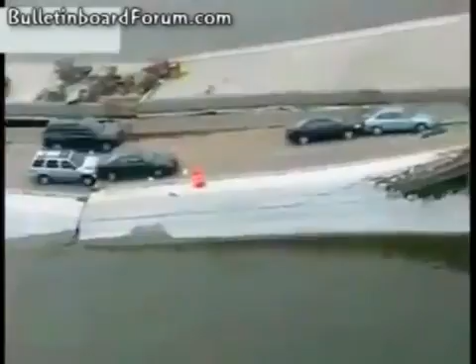In 2007, the I-35 bridge in Minneapolis collapsed in the height of rush hour. 13 people were killed and 145 were injured. In hindsight, there were signs of this impending doom, but there was no system in place to notify inspectors of the deficiency. We wish to introduce a widely implementable system to measure and/or monitor the health of a bridge in real time to prevent tragedies like the Minneapolis Bridge using state-of-the-art technologies available to analysts and engineers.

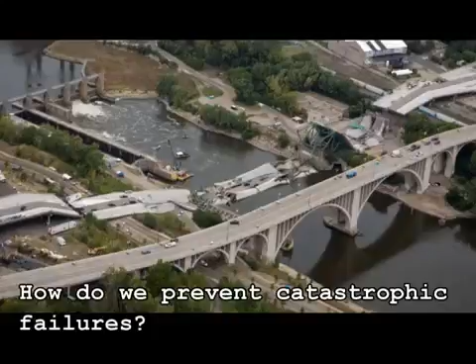Structural health monitoring is the task of assessing the structure's integrity in order to determine whether that structure is able to meet its operational requirement. Many infrastructure systems continue to be used despite aging and the associated potential for damage accumulation. The fact that nearly 70,000 bridges in America, 1 out of every 9, is now considered to be structurally deficient.

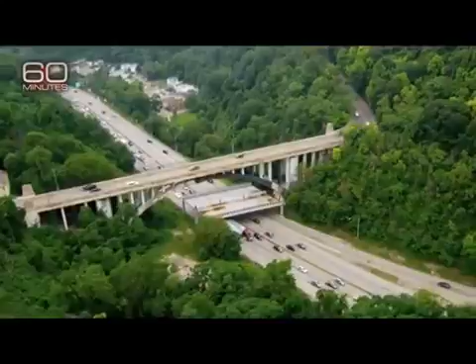These arch bridges actually have a structure built under them to catch falling deck. See that structure underneath it? They actually built that to catch any of the falling concrete so it wouldn't hit traffic underneath it. That's amazing. It all comes down to funding. Right now, they can't keep up with it. 300 bridges become structurally deficient each year in the state of Pennsylvania. That's 1% added to the already 23% they already have. They just can't fix them fast enough.

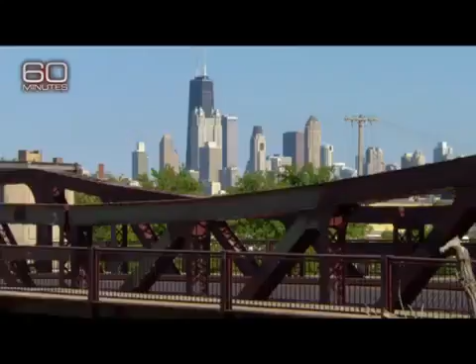With rising costs and shrinking budgets, the ability to monitor the structural health of these systems is becoming increasingly important from both economic and life safety points of view. For all these reasons, it is necessary to develop methods able to identify damage at its onset and to provide infrastructure's authorities with information on the structure's integrity. Such information is necessary to make educated decisions regarding the system's maintenance, repair, and retrofitting.

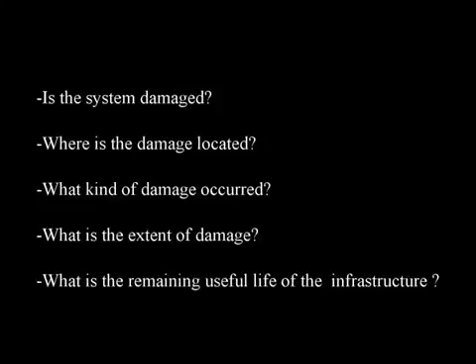The structural health monitoring techniques that we introduce try to answer the following questions. Is the system damaged? If so, where is the damage located? What kind of damage occurred? And what is the extent of the damage? Finally, what is the remaining useful life of the infrastructure given the identified damage conditions?

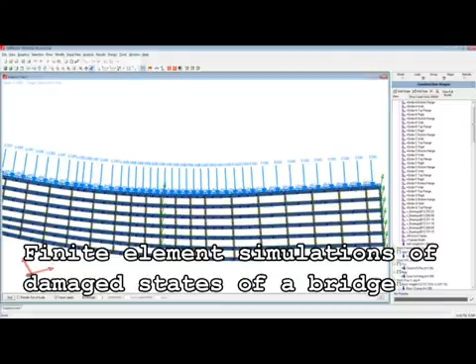In order to answer these questions, we use techniques that are used by civil engineers to design these bridges: finite element simulation software. Finite element simulation techniques provide an understanding of the response of a structure under loads when the geometric and material properties are known. In a regular design process, one finite element model is generally used to capture the response of the structure. In our approach, we create a database to capture the response of every state we can imagine, damaged or not.

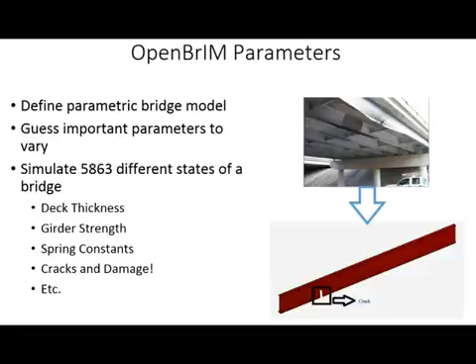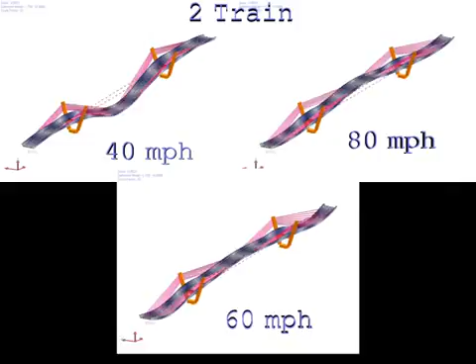For that reason, we use OpenBrIM to define our bridge parametrically. We then vary the parameters like crack width, crack location, deck thickness, and many others. This enables us to create a simulated response for every permutation of the defined parameters. The acceleration response of the structure under train loading is recorded for future analysis. By measuring the bridge response with sensors strategically placed on the structure and intelligently analyzing these measured responses, it is possible to identify damage occurrence.

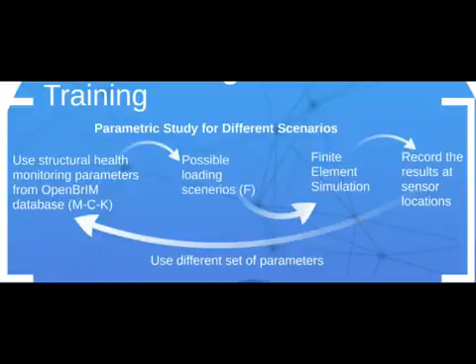OpenBrIM is used to parametrically model the bridge. The parameters are used to create mass, stiffness and damping matrices. We apply loading scenarios like trains or an earthquake. Larsa 4D is used to run finite element simulations. Results are recorded at sensor locations, and the process is repeated for other parameters. The result of this process is a database that maps every parameter to a response.

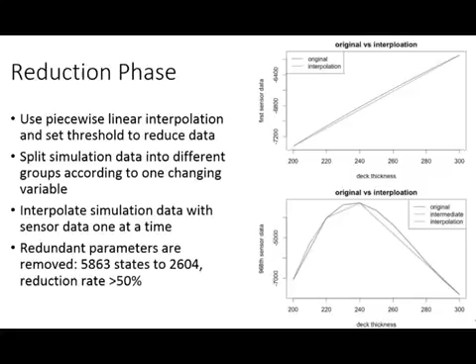In the data reduction phase, we first use piecewise linear interpolation to reduce the data. The simulation data is then grouped according to a single changing variable, or parameter. We interpolate the simulation data with the sensor data. Redundant parameters are then removed, thereby cutting the dataset in half. So what do we do with all this data? The end goal is to develop a method to relate real-world bridge data to our generated data.

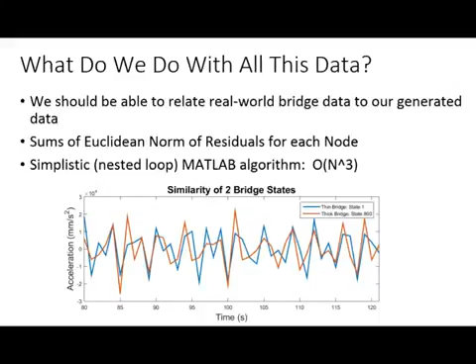Here you see graphs of two parametric states of a bridge. The plot in red represents a healthy bridge. The second plot, in blue, represents a bridge with a deteriorated or thinner deck. We measure the similarity of these two bridge states using the Euclidean norm of the residuals. Now we can do this for both the time domain as shown, or in the frequency domain.

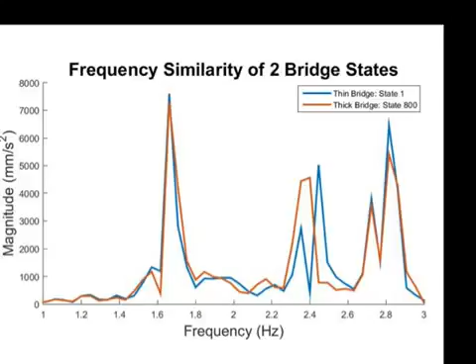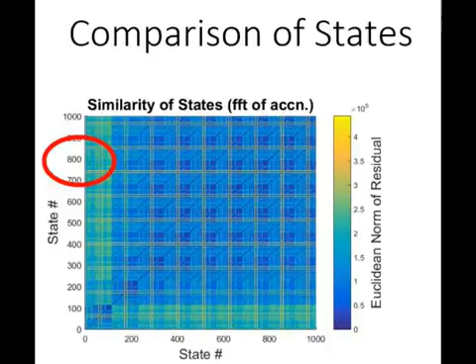Here we've taken the fast Fourier transform of the same data, again with the healthy state in red and the deteriorated state in blue. At about 2.4 Hz, the bridge response becomes bimodal from a single wide peak. The Euclidean norm will account for this variation. We can then perform our Euclidean norm calculation to compare every bridge state to every other bridge state. The resulting map, shown on the left, illustrates a region around the two states of low similarity, shown by the yellow coloring.

If we zoom into this map, we see some other interesting correlations. It appears that every 115 columns, there is some repetition in the figure while getting slightly darker. It turns out that every 115 rows, the deck material density parameter is changed. Another significant feature we notice is the crisscrossing yellow lines throughout the figure. It turns out that one of these lines occurs when the modulus of elasticity of the main girders changes. The other line is when the bearing spring constant changes. The bearing spring is the main point of connection between the bridge columns and the deck itself. This makes sense since the main girders and bearings are such a critical aspect of the bridge structure.

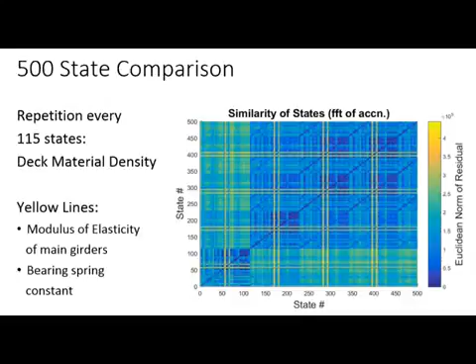There are many necessary improvements needed in order to improve the methods we developed in this project. These include alternative modeling methods for the bridge itself. We also need to validate whatever models we choose against real-world bridge data to determine their validity. In order to develop a machine learning aspect to this project, we need a more advanced distance function. Euclidean distance simply does not capture enough information for a machine learning algorithm to operate. Finally, we should develop a reversed recommender that takes as an input real-world bridge data and outputs the expected parameter set.